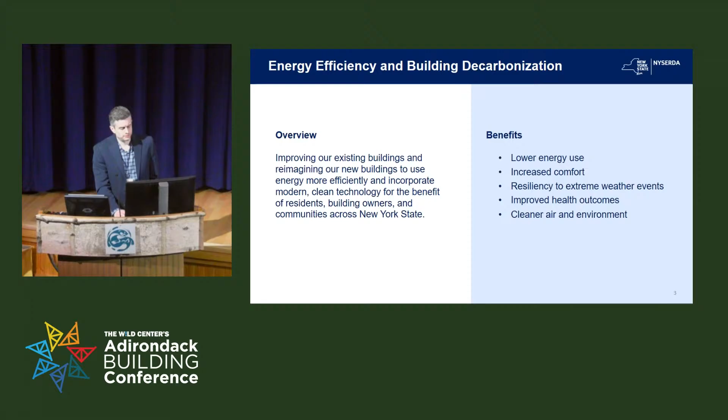NYSERDA's buildings work is focused on energy efficiency and decarbonization in buildings. We seek to improve our existing building stock and reimagine how we design and construct new buildings to use less energy and incorporate modern, clean technology for the benefit of residents, building owners, and communities across New York State. Through better buildings, New Yorkers can experience many benefits, including lower energy use, improved comfort, resiliency to extreme weather events, improved health outcomes, and cleaner air and local environments.

I think, as everybody knows, New York is a built state. We have some of the oldest building stock in the country. There are more than 7 million buildings in New York State, and buildings represent one of the most significant sources of greenhouse gas emissions. Our building stock accounts for roughly a third of the total greenhouse gas emissions in the state, with the greatest energy use coming from space heating and cooling and also hot water heating. So modernizing our buildings to be more energy efficient is critical to reducing emissions.

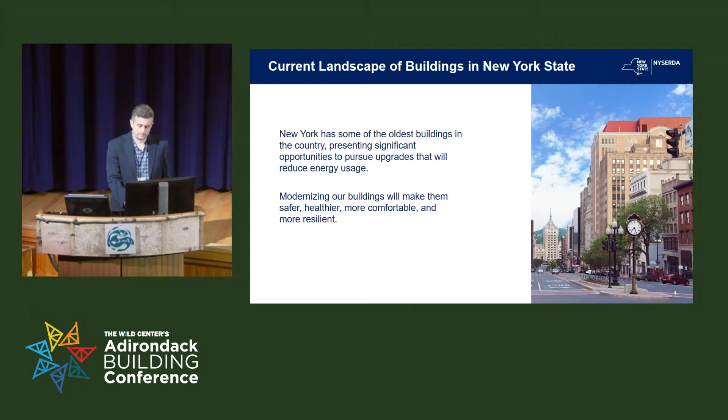So the bottom graphic there, the bar chart, focuses on commercial construction. I'm not really here to focus on commercial buildings, but the story's the same. Most of our buildings in the state are old. Similarly, understanding the types of fuels that are currently being used to heat homes, and how that heat and cooling is distributed within a building, are critical data points to understand how buildings can be improved. As mentioned, heating and cooling and water heating represent the bulk of the energy use in buildings.

In residential buildings, the predominant source of heating fuel is natural gas. The balance of these fuels is different in the North Country, but statewide, 70% of buildings rely on natural gas to heat, 20% rely on oil or propane, and 5 to 7% on electric forms of heating like resistance heat and, better yet, heat pumps.

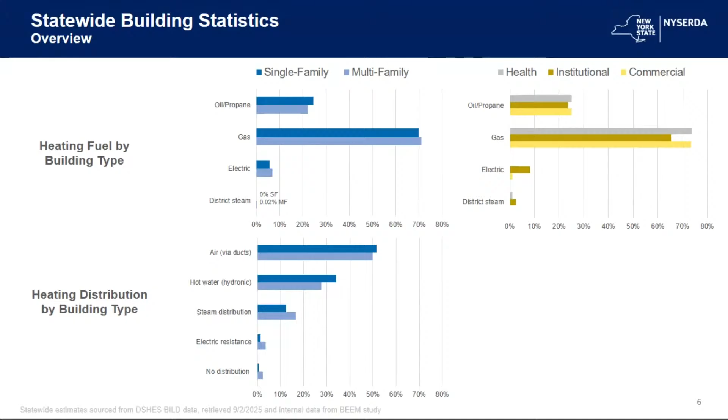Similar story for commercial, institutional and healthcare buildings and facilities. In general, about 65% to 70% of commercial buildings use gas, 25% use oil and propane, and electricity accounts for roughly 8%. Although institutional buildings like healthcare facilities aren't using a ton of electricity for heating.

So looking at a high level, some of what we do in our buildings portfolio. To advance energy efficiency and building decarbonization across New York State, NYSERDA implements some of the following strategies. We look at market transformation activities like demonstration projects. We support neighborhood scale decarbonization through programs like community thermal energy networks. We look at supply chain and workforce development and financing solutions to reduce risk and attract private capital for

projects throughout the state. We look at energy codes and standards to advance building safety and energy efficiency, which generate savings and improved air quality and health outcomes. And we support efficient decarbonization, focusing on disadvantaged communities and low to moderate income New Yorkers. Resource deployment helps build trust. It demonstrates demand and challenges product solution providers and manufacturers to bring needed technology to market.

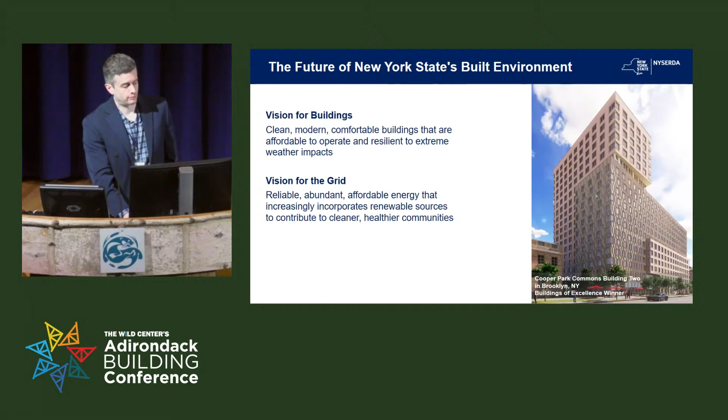So, as we continue our current programming and look to launch new opportunities for New Yorkers, we have two major goals. One being clean, modern, and comfortable buildings that are affordable to operate and resilient to extreme weather conditions. And two, that reliable, abundant, and affordable energy is increasingly incorporating renewable energy sources to contribute to cleaner and healthier communities. I'm just going to look at a handful of programs. There are many more, but I'll go through a handful that are designed to help meet these goals.

This was launched in April of 2025 to help building owners navigate the efficiency and decarbonization process. The Owners Representative Services for Multifamily Buildings program makes available a qualified group of technical experts. It's a no-cost program to help building owners as they plan, design, and install energy efficiency upgrades. These projects can access up to $35,000 for services, from project planning to construction and preparing for long-term operations and maintenance of the new building systems.

It's open to multifamily housing that meets at least one of these eligibility criteria: either located in a disadvantaged community, meets NYSERDA's affordable housing guidelines, is a condo or co-op, or is no more than 50 dwelling units.

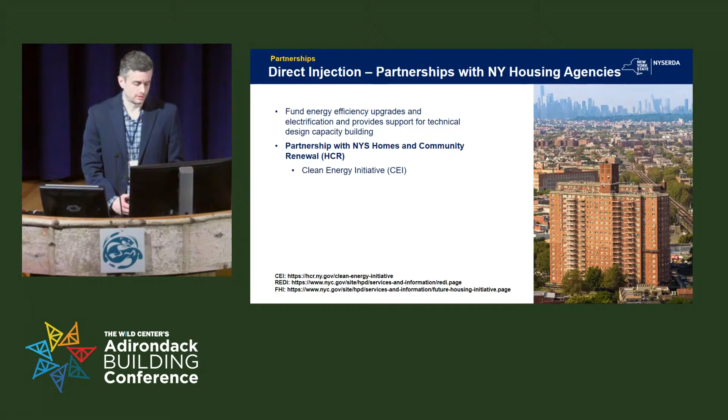The Clean Energy Initiative, or CEI, is led in collaboration with state and city agencies to provide funding for efficiency upgrades and building electrification. CEI is a partnership with New York State Homes and Community Renewal to develop a model for incorporating clean energy incentives and technology support into affordable housing. CEI funds efficient all-electric retrofits for existing and historic buildings, and it provides gap financing for that decarbonization work. NYSERDA has pledged $100 million in funding to HCR for this initiative.

The Affordable Multifamily Program Upstate, or AMP Up, is not yet released; it'll be launched this year though. But it's intended to make it easier for multifamily building owners and property managers to improve the energy performance of their buildings. Navigating retrofit projects is often complex and overwhelming, so the goal is simple: to remove barriers and make comprehensive building upgrades achievable and rewarding for owners and managers.

AMP Up is designed to feature customer support built around complimentary technical assistance. From the first conversation through project completion, participants will have access to experts who can guide them every step of the way. AMP Up is planned to offer financial incentives to support energy efficiency and building electrification, again, designed to make multifamily buildings with 5 or more units more affordable.

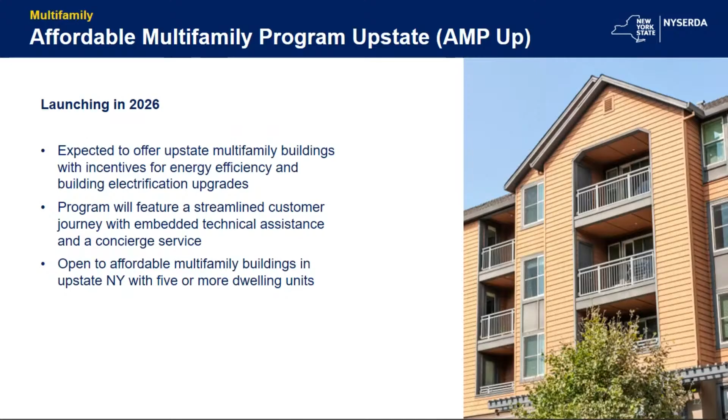Projects must receive electricity from an investor-owned utility other than Con Ed, so this is not eligible in Con Ed territory. Incentives will be available for 4 categories ranging in complexity. Those are prescriptive, weatherization, building electrification, and deep energy retrofit. And those incentives will be stackable, so it'll allow the program to meet customers' specific needs.

I'm actually going to skip this one because I think I'm running long. Briefly, there's a large-scale thermal program. This is a $10 million competitive program which was launched in June of '24. It provides cost share for design of large-scale thermal systems in new and existing single building and multi-building projects. It is meant to support projects that are replicable for significantly reducing greenhouse gas emissions from heating, cooling, and water heating, and minimizing energy consumption. This is open to new and existing large single building and multi-building projects.

We also have the appliance upgrade program. Residents that are under 150% of the state median income can apply through My Energy, which is found on NYSERDA's website, to receive rebates for ENERGY STAR certified heat pump clothes dryers, and that would include all-in-one washer dryers that are heat pumped. Additional rebates are available for any electrical wiring or panel upgrades that would be needed to support the new appliance.

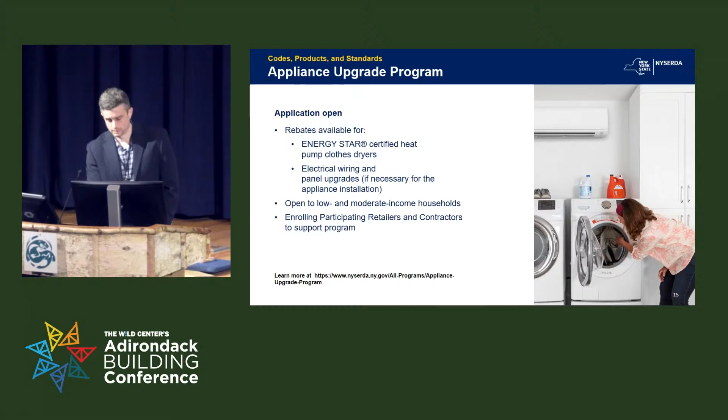So as I mentioned, I focus entirely on the energy code, and NYSERDA also works to support building efficiency and resilience through energy code development and compliance and enforcement. I'm sure many of you are very familiar with the energy code, but it's a minimum construction standard for efficiency in buildings. It's enforced at the local level. Sounds like we have at least one code official here. In general, it applies to all new construction and renovation. There are some exceptions. And it covers all major building systems. The code ensures that buildings are efficient now and through their effective lives.

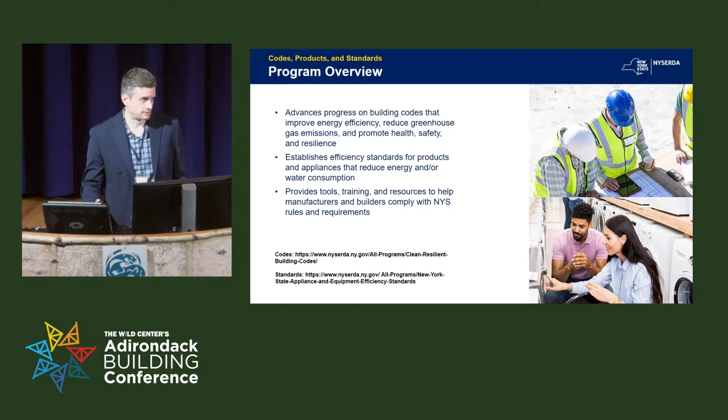Training is offered statewide. Almost exclusively, it's offered online at this point, although we do have in-person events that come up throughout the state, but it's almost always free, so keep an eye out.

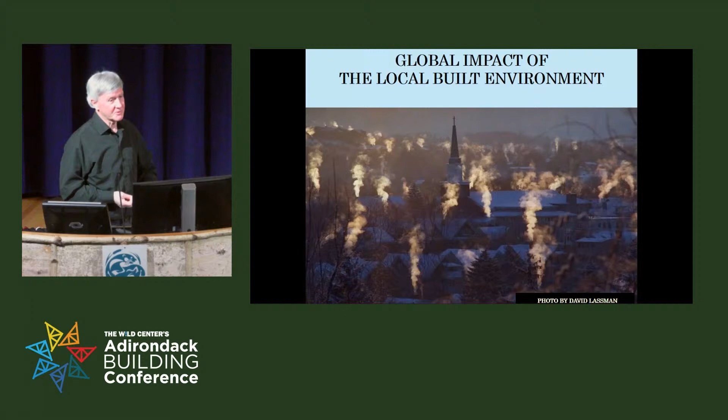This is a picture of where our office sits, up on top of this hill. If you look down here and think about it for a minute, our buildings really are alive, and they do create a lot of emissions. I think Chris just proved that when I looked at the slide, how many houses are still on either oil, gas, or in some cases coal, because there's a coal-fired power plant in the far back right of that picture.

So if you start thinking about what really happened five decades ago, well, actually it was a quiet marine biologist named Rachel Carson. When she published her book, she took on the chemical industry and parts of our government—Silent Spring—but she won. And that was the start of everything we need to know about energy right now.

It actually was the first code, the energy code. Our first energy code was ASHRAE 1975, and it was created because of that war that got started way back when. So we fast forward, and we're 50% better now. But our goal in New York State and the country right now, in that glide path, is actually zero by 2050. So this is getting pretty aggressive.

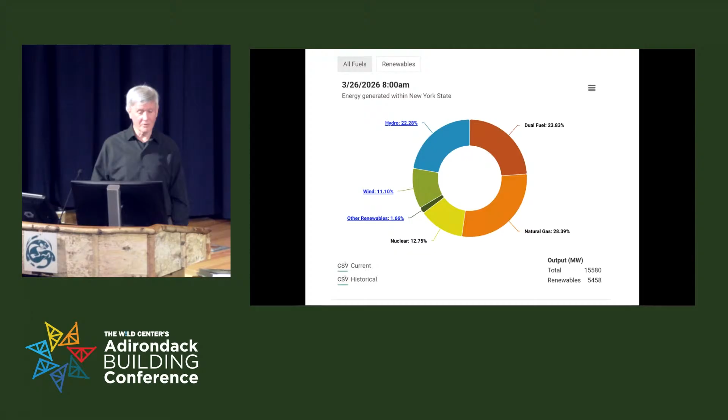It was actually one of the big things when Andrew Cuomo would stand up and say we have the best renewable energy in the nation, but it was all because of the hydro, and we know where the hydro comes from, right? If you look at the renewable side, hydro's at 64%. Yesterday morning, it was 20% less than that. So you can see what the oil and gas prices are doing to us right now. We're coming to rely and pull more of our energy in New York State basically from hydro, and you can see where wind actually jumped up a lot.

That's strictly New York State. We are getting hydro from—you guys know the line's running down the Hudson River right now into New York City, right? That's in play. That's the power coming from Canada.

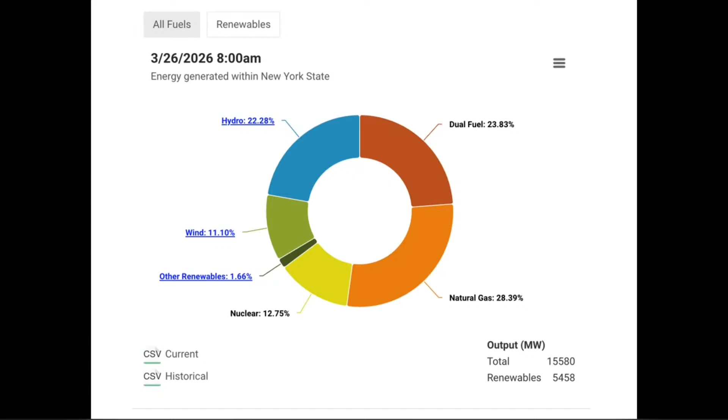Good question. Geothermal, and I believe nuclear was already up there, right? Nuclear is in there. Yeah, there it is right there, 12.75.

And it may go even worse than that the way things are happening, right? So on December 16th of 2025, that's not that long ago, there was a unanimous vote to accept the New York State Energy Plan as an all-of-the-above approach. So the New York Independent System Operator slide that I showed you is probably going to be what we're going to be seeing for quite a while now.

No. And this is where we're starting to hear these things over and over again. But in New York State, we do things differently, right? Andrew Cuomo, again, way back in 2006, skipped to 2009. We hit that code, and then we went right to the 2015 code. That was a 20% energy reduction in a simple code change.

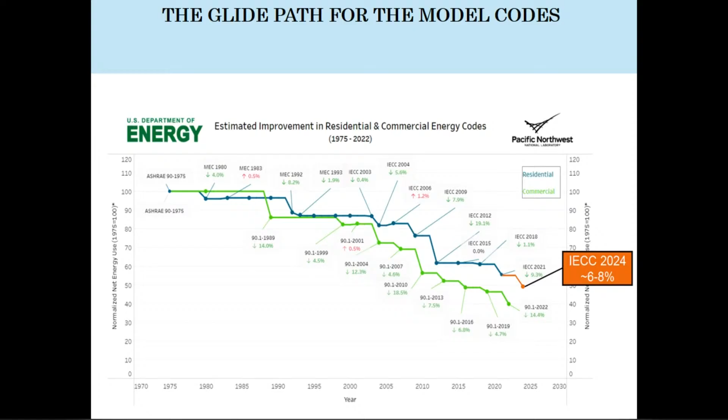So where are we now? If you look at it, we didn't do... starting with, I don't have a laser here, but if you start backing up the graph at the dark line there, see the 2015 code to the 2018 code, and now we just adopted the 2024 code. So we skipped the code cycle of 2021. So if you add those numbers together, we're much closer to about 17 to 19% energy reduction. That's where we are right here today.

And that's important. This is the first code cycle ever that's introduced two more performance tests. 2015 was the first ever code to introduce the air leakage test, the blower door test, right? How many are familiar with the blower door test in here? Everyone's doing them for your certificate of occupancy because it's required, right?

It's mandatory. It's not should, it's shall. All right, so when we start to look at these codes, we start to see what's really happening, right? There was no grace period, again, no transition period. We immediately went in on December 31st of 2025. At that last hour of last year, any permit that was pulled after that had to go into the new code.

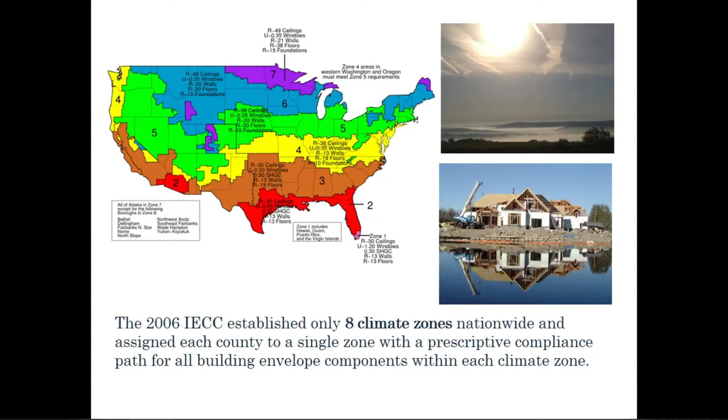What they did is they took 18 climate zones and reduced it down to 8. When I drove from south of Syracuse up here, I supposedly only went through 2 climate zones, but I'll tell you, I probably went through about 5.

When we build in the hills of Manlius, New York, up on the top right, we're in climate zone 5. When we build on the shores of Skaneateles Lake, we're still in climate zone 5. But they're totally different climate zones, right? How many of you know about Skaneateles Lake? It has the best sailing and the best vineyards, because we have westerly winds that come across the hills and blow across the lake. Great for sailing, great for growing good grapes for wine.

We're sitting on the east side of Skaneateles Lake here, right behind the biggest humidifier you could find. Because how do humidifiers work? They blow air across little bodies of water, right, in our furnace or air handling systems. That's all they do. So what we decide to put into our homes for insulation, building envelope, and air leakage, air barriers, is pretty different from when we build on top of a hill in Manlius, New York, versus on the shores of Skaneateles Lake. Hygroscopic building materials are not good when you're sitting right next to the largest humidifier in New York State.

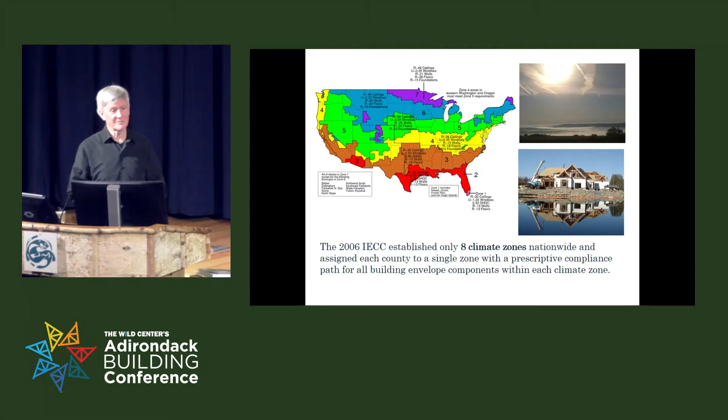So this is what New York State looks like. The climate zones haven't changed that much, or have they? Because Zone 6 has—look what we just did. We just moved 8 counties out of climate zone 6 into climate zone 5. All that movement is based on heating degree days, nothing else. That's all it measures: heating degree days and cooling degree days. Imagine that—it has nothing to do with the wind loads Art is going to talk about or anything else. We just slid 8 counties into Climate Zone 5.

That's going to get pretty important, because in Climate Zone 6 this year, for the first time ever, an HRV or ERV is required. If you're building in Climate Zone 6, you have to have a heat recovery ventilator or energy recovery ventilator, and it has to be set to an ASHRAE standard, ASHRAE 62.2, 2018. That's going to change—it's the standard referenced in the code book, and it will change outside of the code book, but it won't change until the code catches up to it.

That's important to know. When we talk about ASHRAE 62, it's a simple formula: 0.03 times the conditioned area of the home, which you can get right off the building permit, plus the number of bedrooms in the house plus 1. So what does that mean? Why do they say number of bedrooms plus 1? It means the ASHRAE standard considers that 2 people are in the master bedroom and every other bedroom has 1 person in it.

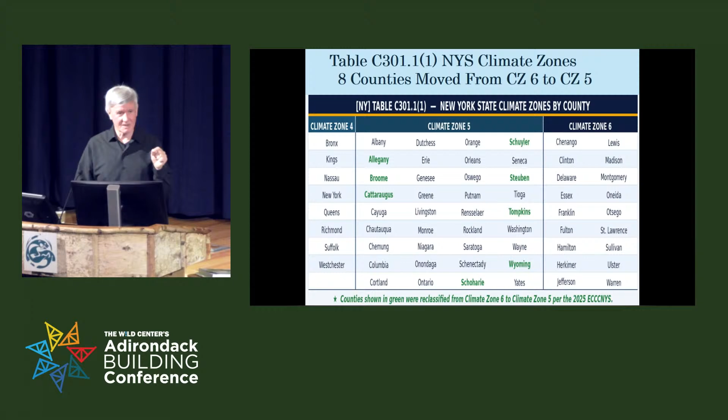This year alone, for the very first time, the code cycle decided that 5,000 square feet was a big house. And it means a lot—it changes the metrics of the prescriptive code. It changes just about everything.

That's going to be important, because here's the builder side of me coming out. ASHRAE 62.2 started a long time ago, way prior to 1975, the first energy code. It literally started like this: they put 10 people in a small room and introduced air changes just by opening and closing windows. When 3 people left the room, that became the standard. That was it, way back when—that's the 0.35 air changes per hour that we came up with.

That was it. In today's cycle, we went from 0.01 times the conditioned floor area to 0.03 times the conditioned floor area—it hasn't changed, by 0.02%, it hasn't changed at all. It's still based on the fact that 3 people left a room after a certain period of time. But the code tells us, because it references ASHRAE 62.2, there's a chart in the code book so you can look up the number of bedrooms, square footage, and it'll tell you how many CFMs you have to introduce.

Mandatory introduce, not should, it's a shall. How often in these big houses that you guys see that's 5,000 square feet, do you see 6 people living in that house? How often are they actually in the house up here in the Adirondacks? Not often. So we have a code that's telling us what the air changes have to be in that house, mechanically ventilated, that's based on a standard created 50 or 60 years ago, but doesn't necessarily do justice to the house.

So the big thing here is that the R49 reduction was because the building scientists proved in a simple flow chart, XY axis, that after R49, the return on investment was 2 to 3%. That was it. It makes no sense to go to R60 and have the builders pay for it and pass the cost on to the homeowners. It makes no sense at all. So they reduced it. That is the first time ever that has happened in the code. Everything gets stricter and reduces energy, but now we got something where someone actually listened to the building science and said, oh yeah, no, not that. It doesn't make any sense to make us pay for an R60.

And we got trusses or rafters 2 foot on center, and then we're piling up what? 38 inches of cellulose, which is hygroscopic. And if you don't have the proper vapor barrier, it's going to grab hold of that moisture, and those ceilings are going to start showing some fastener or nail pops and/or come down.

We actually did a low affordable, LMI they would call it, down in Schenectady, New York, which was a Race to Zero Energy winner in the Department of Energy contest. They won $25,000 for this, built it. They wanted to do better, so for some reason they put as much cellulose as they could on top of that ceiling, and it came down. So R49 is the prescriptive measure. Remember, these are the prescriptive measures, right? The other thing you start seeing, we're going to talk a lot about duct leakage, because that's a massive change in the codes right now.

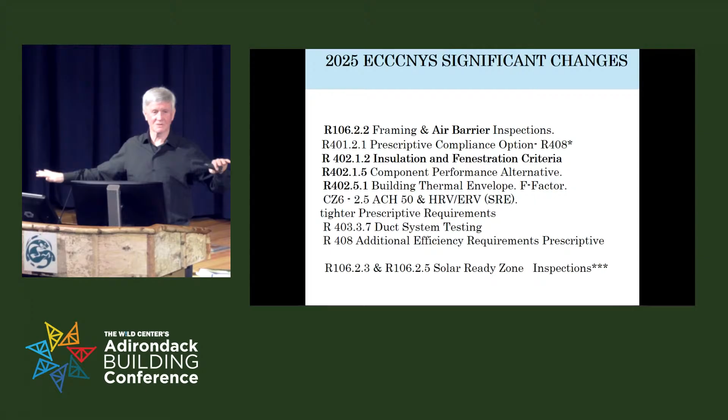Do you know where we get the most air leakage when we do our air leakage test with a blower door? We don't even have to do the forensics. The zonal pressure diagnostics, where we can put a tube into the ceiling and find out if the attic space is connected to the house. Put it into the garage. Where's your air barrier in the garage? Not Tyvek house wrap, right? It's the drywall. And it only has to be fire taped, right? And do we do as much air sealing in our garages as we do in the rest of the house? Not even close, right?

And what do we put in our garages? Everything we don't want in the house, right? Cans of oil, cans of gas, our car, our lawnmower, old paint products, everything that's going to outgas with high VOCs that actually do react in the atmosphere and cause harm. Well, if the air barrier is broken in the garage, that's a bad thing. And how do you inspect for an air barrier in the garage when all you got to look at is drywall?

That's it. You can't see around the base, but where your mud sill's hitting your concrete blocks or your concrete wall. So the next area, biggest area of leakage, it's not the ceiling. It's usually that perimeter of the base where you have a wood product that hits a concrete product. Concrete doesn't move and the wood's moving, right? We put this thin thing of foam down, and next thing you know, we're finding we're getting a lot of our air with exhaust-only ventilation.

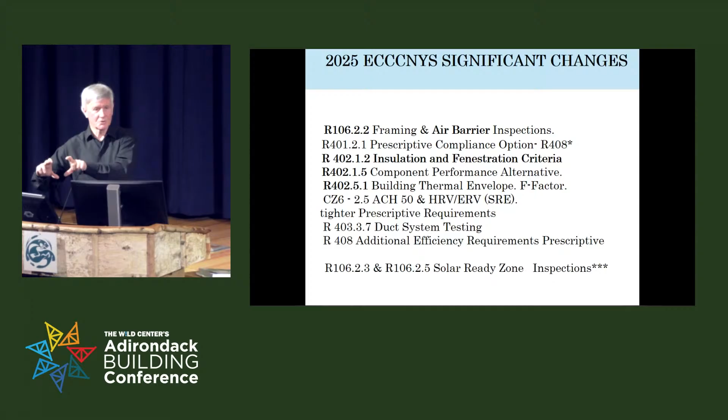We talked about the additional efficiency requirements, prescriptive path only, not in the ERI path or simulated. And then I just put in there the solar ready zone inspections. If you put one in, then you have to do it. But all those appendices were rooted out of the International Energy Conservation Code. There's like 7 of them that were built into the code, got passed, then on appeal were all taken out. What New York State and the 2024 IECC allowed is they put those appendices in the code book so that any state or municipality can yank them out and make them part of the code if they so choose. The only one that New York State adopted was the RF one. RF stands for residential fenestration, but the only reason it's there is because there's the chart for the F factor you have to use to put in your models. You have to measure the heat loss from your concrete slabs.

So here's the 3 pathways. I mean, this is actually on the exam when you take a plan reviewer test with ICC or whatever. There's 3 pathways for compliance. R401.2.1 prescriptive compliance option. There's 3 ways you can do it. It's a simple prescriptive. You're better than what they are by a certain percentage, and it's like 20%. So here you go. Here's the code sneaking in electrification. If you have a fossil fuel appliance in your house, you have to have a 20% reduction. If you're all electric, let's say air source heat pumps or geothermal, it's only a 15% reduction. So they're sneaking it in probably about 5 or 6 places here that unless you read this code book quite a bit, you don't even know it exists there, but it does exist.

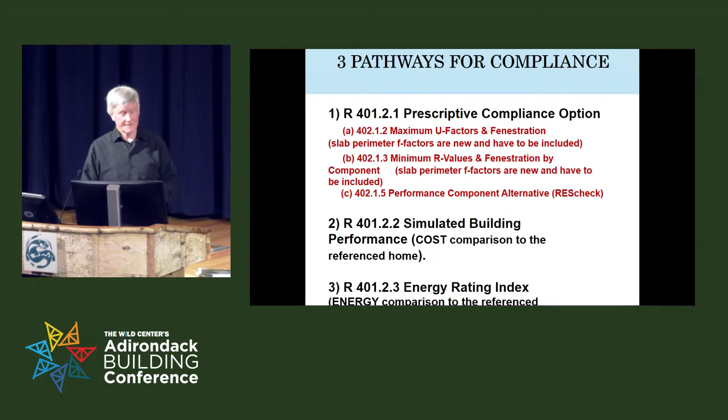So the simulated performance doesn't include lighting. It only includes your heating, cooling, and ventilating. That's all the costs they're measuring right now. And if you can beat that, you got it. I would say the most often one that is not used now, the energy rating index. I mean, we should have been using this for the past 20 years because 45L was that federal tax credit that gave you $2,000 if you hit the mark right now that we have to hit, right?

Builders didn't want to do it because you had to do all the other testing. You had to do the air leakage test. Well, 2015 code, got to do the air leakage test. You had to do the duct leakage test. Well, 2025 code, you got to do the duct leakage test. You had to do the mechanical ventilation test. Well, 2025 code, you got to do the mechanical ventilation test. We're there. The 45L tax credit.

There he is back there. I can't impress enough that my son Josh is sitting here. He's building on Cazenovia Lake, high-end house on Cazenovia Lake. He calls in for an insulation inspection. He doesn't get a call back for 3 or 4 days. He wants to get the drywall up. Time is money. You got a drywaller scheduled, you better use them, right? He hasn't even gotten a call back yet, so maybe he'll get an insulation inspection next week, right?

That's a municipality that can do what they need to do on their schedule. If you hire a HERS rater—here's the key—it doesn't have to be a HERS rater. If you want the tax credit in the next 3 months, it has to be a HERS rater. But to do the energy rating index, it does not have to be a HERS rater. It can be anyone the authority having jurisdiction says can do that.

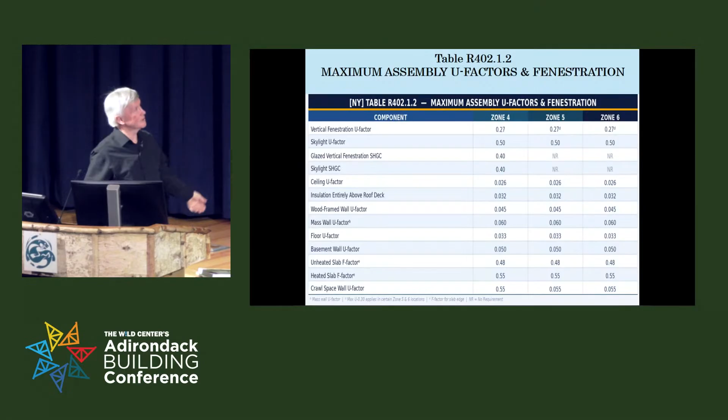This is the prescriptive side: the fenestration is 0.27 for all climate zones. The skylight, we won't go through that. Glazed vertical fenestration, the solar heat gain coefficient in climate zone 4—this is one where I think code officials had maybe 1,000 things, and hey, you got it wrong. Look at that, third one down: glazed vertical fenestration, solar heat gain coefficient, 0.40, climate zone 4 only, nothing else, right?

Let's go to this one. Oh, look at that, third one down: climate zone 4, 0.40; climate zone 5, 0.40. Why the difference? What happened there? Is it an error? No, because we measure the resistance, the R-value, differently than we measure the U-factor. Even though they're the inverse—you can go from an R-value to a U-value just by dividing by 1—because they're the inverse, but they're computed differently.

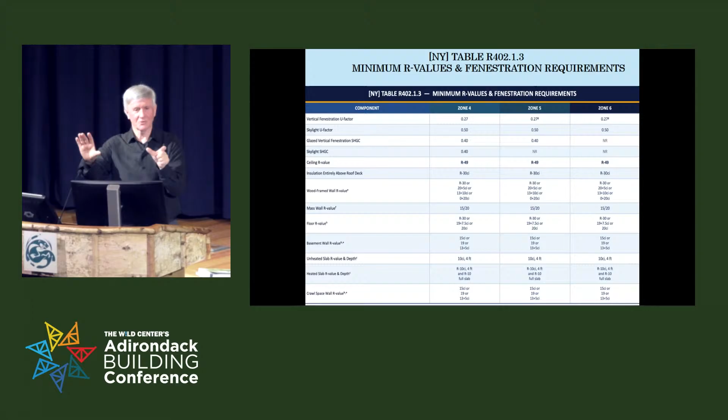So if you start to look at these prescriptive charts, you better know what you're looking at, because in climate zone 5 we do have a solar heat gain coefficient of 0.40. So now you're talking to the window manufacturers that prescriptively say—I'm just going to use Marvin Ultimate because I get more calls about that than anyone else—that meets the 0.27. But now if you use that other part of the prescriptive code, you've got to put the solar heat gain coefficient in there. For everyone who knows about windows, the solar heat gain coefficient and the U-value change with each other. When you start lowering the U-value, you're raising the solar heat gain coefficient. Simple physics.

Wood frame walls: you can rate it across R30 in climate zone 4. If we sneak over, they're all the same—right across the board, climate zone 4, 5, and 6. How do we do that? How do we get an R30 in a wall assembly that's, say, a 2x6 wall assembly? Can't do that directly—can we do 20 plus 5 continuous? Continuous insulation on the exterior or the inside means continuous. It doesn't mean you can put something between the foam or whatever you're going to put out there—it's got to cross all framing members, right?

That is the biggest benefit for the buck, because if you take a wall assembly—and I'll show you this a little bit later—reality: if we look at, let's say this is a wall assembly back here, and we say, oh, we just put R20 in the cavities, is that an R20 wall?

Not even close. If it's 2x6, 24 inches on center, it has a framing factor of 23%. 2x6 studs are only 5.5 inches, with an R value of 5.5. The cavity might have an R20, but the studs don't, the plates don't, the headers don't, the mud sill doesn't, the box sill doesn't, right?

So most of the computer generated models take that into consideration. Used to be called the UA total, now it's called the component UA result. So they're measuring just thermal conduction, nothing else. And if you put some insulation on the outside of these buildings, you just knock that thermal conduction down. You can pretty much start to play with the intricacies inside the models so you can get a wall assembly that you can actually build.

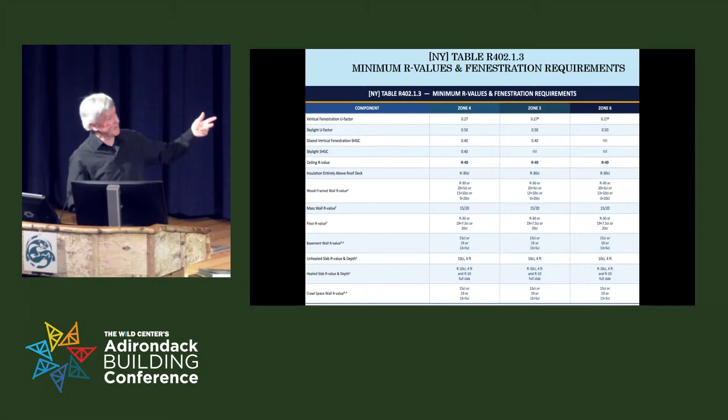So the heated slab has a different condition than the unheated slab, but we're still an R10 continuous 4 feet down. And again, there is a description of what continuous insulation means.

I think we all know this. R values are additive. You can add R values together and come up with the R value of the assembly, right? You can do that, but you can't treat it the same as a continuous insulation. It has to be different to comply with that table.

So when you get U values, I think the difference between an R value and a U value, I'll go into this a little bit later. U values include what an R value doesn't include. You take the U value of a wall assembly, it includes the air film on the outside of that wall, it includes the sheathing, it includes the insulation, the R value that you just took the inverse of to get the U value, it includes the drywall, it includes whatever other finishes on that wall, and it includes the inside air film. That's what the U value includes.

R value does not include any of that. R value is whatever is stamped on that product you put in the wall, that's the only thing you can say it is, nothing else. And the code says when you put your insulation in the wall, it has to have that stamp on it.

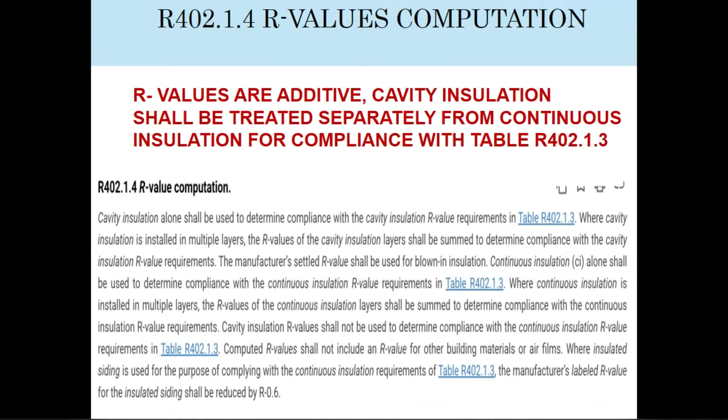Even the friction fit fiberglass has a stamp on it. So the guys that are putting in the wall have to put that batt in so you get to see that stamp, whether it's an R13, R19, R20, R21, R25, or an R30 - you've got to see that stamp.

For climate zone 5, the F factor for a slab is about 0.48, and if it's a heated slab, it's 0.55. That's another one of those things that doesn't make sense when you think about it, because remember, the higher the U value, the less good it is - U values, the lower the better. The higher the R value, the better. So they're the inverse of each other.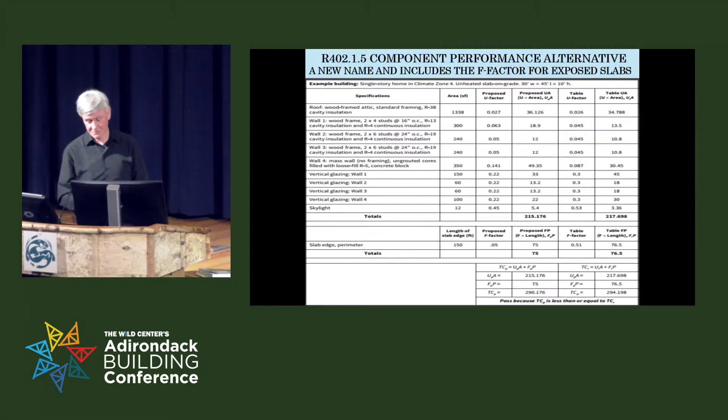F factor - thermal transmittance of the perimeter, the heat loss factor. I went through that, but there's the formula: BTUs per hour times the square foot times the F factor. The F factor is in a chart, and it was actually first described in ASHRAE 90.1, 2010, but was finally recognized in the residential world. That F factor came about because of a free download you can get called Therm, and Therm can measure the heat loss in concrete slabs, and it will show you that it's actually substantial.

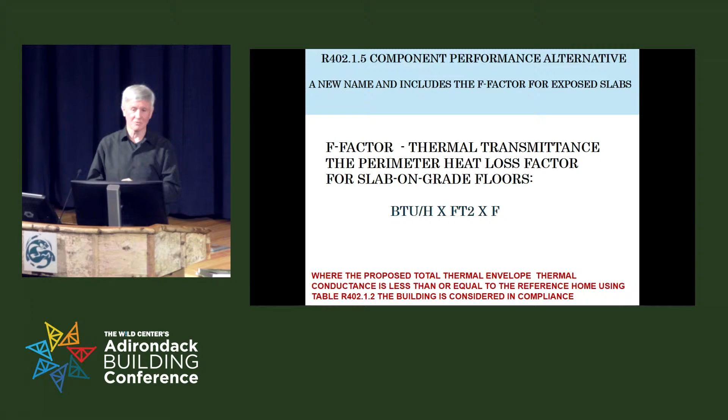I just came from Boston at another conference, and there's people refuting this now, so who knows? Code cycle is only 3 years, right? For some reason, New York State likes to take 5, and that's why we're getting these massive energy reductions all at once - so we actually suffer because of it. I mean, let's be clear, if they're going to gradually start to reduce the code and keep us on that glide path, it's not bad.

That chart that I had and Chris had, right - 7 to 8%, yeah, we can do that. But when it gets to be 17 to 20%, we're using different materials, we're designing our houses differently, and we're installing them differently, right? So it does make it harder on builders.

Res check, right? This is it. It's got the 2025 drop down in it. It also has, and for you code officers, I'm sure you know this, but if you don't know it, it has a checklist you can print out. So when you go to the job site, you should have that checklist with you and just check those boxes, and you got it. Or you hand that checklist to a HERS rater or someone you approved to do the ERI path.

I can't imagine why anyone would want to not go the ERI path. It just boggles my mind. We're doing the same testing. You got a third party.

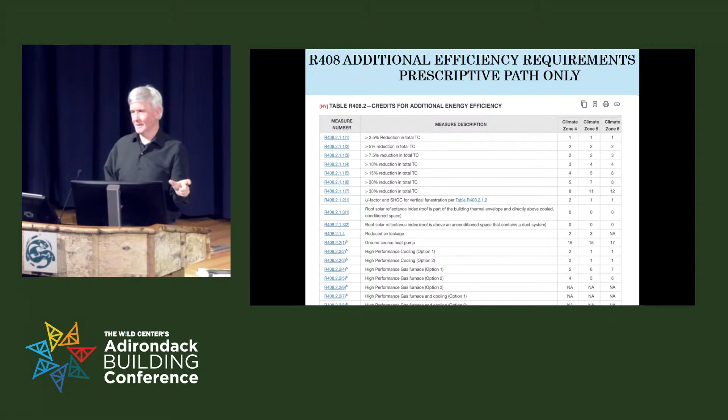You can say, well, I'm in climate zone 6, I'm going to go for that one, I got 12 points. Well, you still have to pick another one. You got to have 2 categories, and if you're over 5,000 square feet, you need 5 more points, so that means you need 3 more points, and you got to choose. And it's up to you, as the builder, architect, or engineer, to choose this. Don't let the architect play around with res check without you guys as builders knowing what he's checking off, because you have to do it. It's not a should, it's a shall.

Glass options are in there, but you can see down at the bottom where the gas furnace options are, they're in there but not available because you cannot mess around with appliance standards. They're protected by the federal government. Whatever the federal government says the standard is for that forced air furnace, you can't make it any more efficient. You can't say it in the code.

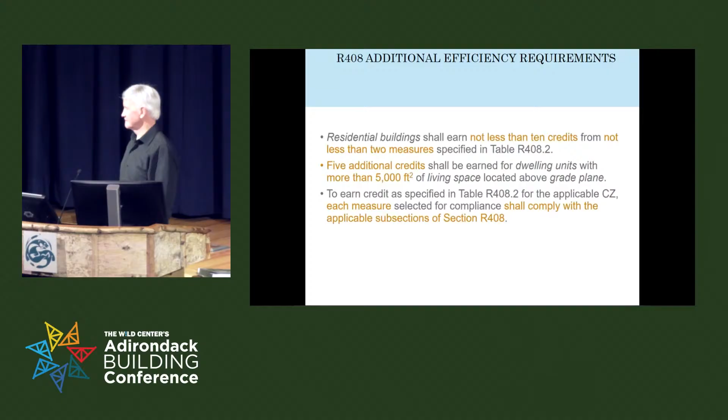It takes up, I think, 2 pages in this book. But for brevity here, that's it.

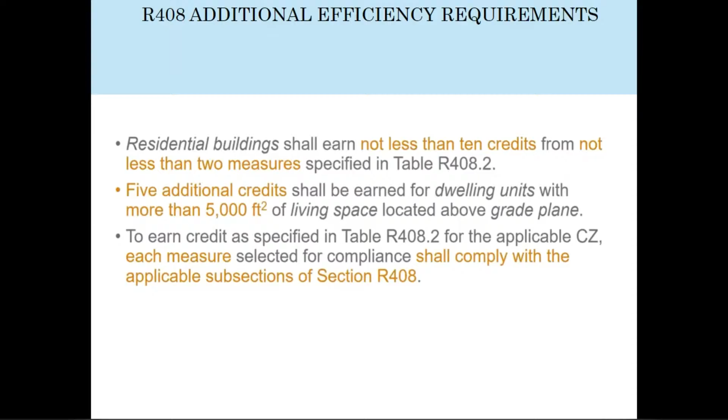So here is in writing, what it says in the code book is what I'm saying, right? So R408 is actually down inside the code book, more towards the end. You got to go looking for it.

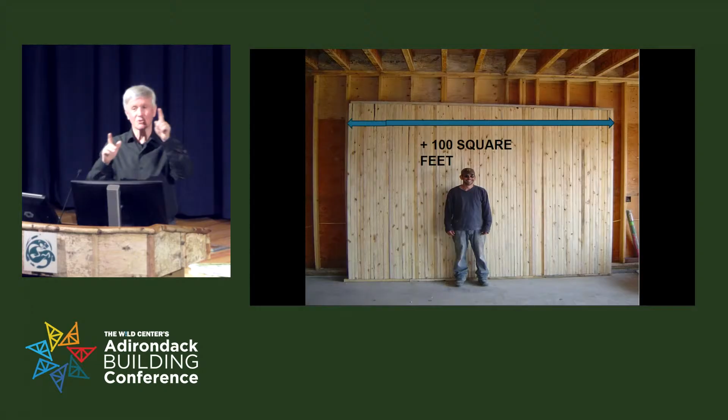So let's say we took out 88 studs, 14 headers. I saved $458 -- again, this is back in 2004. Go to your framing contractor and say, hey, that's a lot less work. You know what they say to you? You know, this is different, I got to use a different ruler or whatever. So they don't give you any credit on it. But there's the studs that I took out, because people can't see it unless you show it to them a different way. That's over 100 square feet of R 3.5 I took out of that wall assembly. And what did I put in its place? R 20, right? That's a big boost.

Interesting thing on this one, I think you guys know in the trades, right? The insulation contractors, at least back our way, they just count sheets of plywood, come up with their number, bid the job, and well, I got 100 square feet of insulation for free because he didn't catch it. He never caught it until he came to one of my presentations and saw me show that slide. And then he started to change his bids a little bit. But that's what it looks like.

They have over 30,000 acres of forest preserved each year, and what do the forests do today? Everyone says plant trees because they're actually recycling carbon dioxide for free, right? They breathe in the carbon dioxide, they split the carbon away from the oxygen, they put all the carbons together on a chain and put the oxygen back out in the atmosphere for us to breathe, keep the 21% oxygen in there so we can actually stay alive.

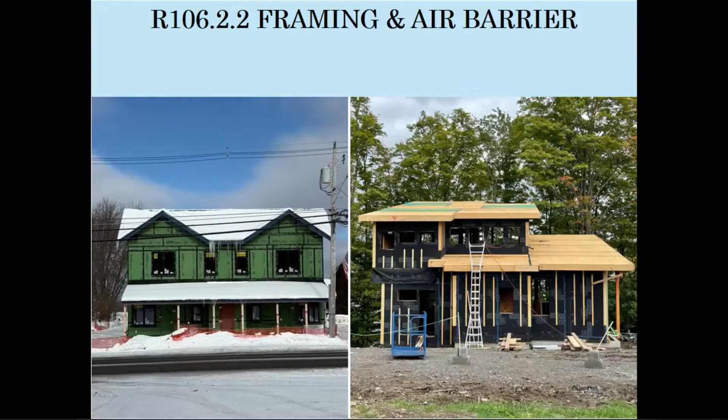Tupper Lake on the left. Rural energy house, all electric on the right. Tell me where the air barrier is. Where's the break on the left? That's good. I mean, you tape it up, you got it, you did your inspection, it's good. Easy to see. Yep. On the right, easy to see, easy to find? Not on your life.

4 inches of wood fiber insulation on the outboard, continuous. Vapor open assembly, because let's start thinking about what's going on with our buildings today. We start to say vapor open or vapor closed. We just moved 8 counties out of climate zone 6 down to climate zone 5 based on heating degree days alone. Nothing else. What about torrential rainstorms?

What about everyone going to put air source heat pumps or geothermal systems into their house? If you have an air source heat pump on your house and it's 80 degrees, you think they're not going to turn it on? The people who never had air conditioning before? Of course they're going to turn it on because you got cooling and heating in one unit.

And it has a COP of somewhere between 2.8 and 3.5. So every bit of energy you put into an air source heat pump, you're getting anywhere from 2.8 to 3.5 of energy coming back at you, just by taking the heat and cool from the air, right? But when we air condition our houses, where should our vapor barrier be?

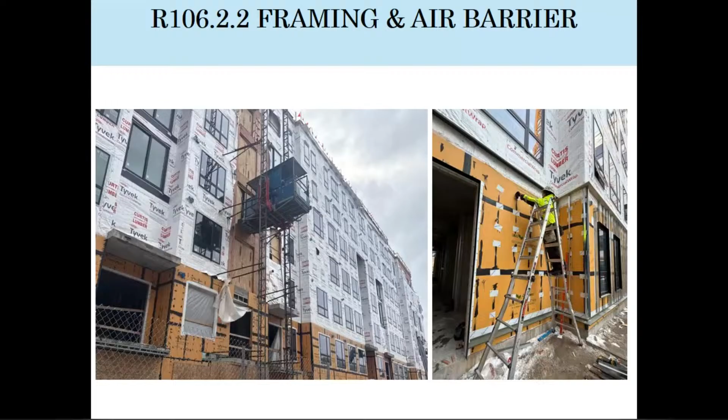Oh, this is a job I'm working on right now, right? 610 unit, it's multifamily, it's more than 3 stories, so it's not in the residential code, but I'm showing it's like, where's the air barrier here? I've got to find it, and I can't find it with a blower door test. I can't do pressure diagnostics or zonal pressures here. This is a prescriptive project. It's $80 million. It's going to have 610 students in it, and we know what happens on Friday nights, right? Where's the moisture on Friday nights? In one of those rooms, right?

But we've got to identify the air barrier, do a good job of taping. We got to identify what's going out. Oh, a big concrete projection on a balcony. Can't change it. The municipal code officers came in and failed them because their poly didn't wrap on the headers and the studs perfectly and wrap all the way around the window extension jambs and tape to the window.

Oh, here you go, code officers. Mandatory. Shall. You've got to test the mechanical ventilation. It's got to meet ASHRAE 62.2, or it's got to hit that chart that's on page 97 of the code book. And the only reason that the code officials gave you a chart is because the code cycle is every 3 years. ASHRAE can change anytime. If ASHRAE changes before the code changes, you got a mismatch.

So there's a chart inside that book that you can go across to the square footage, and you can go across to the number of bedrooms. Remember, it's the number of bedrooms plus 1 for ASHRAE 62.2. For whatever reason, there's always 2 people in the master bedroom and a person in every bedroom in the house, right? But so I would use the chart.

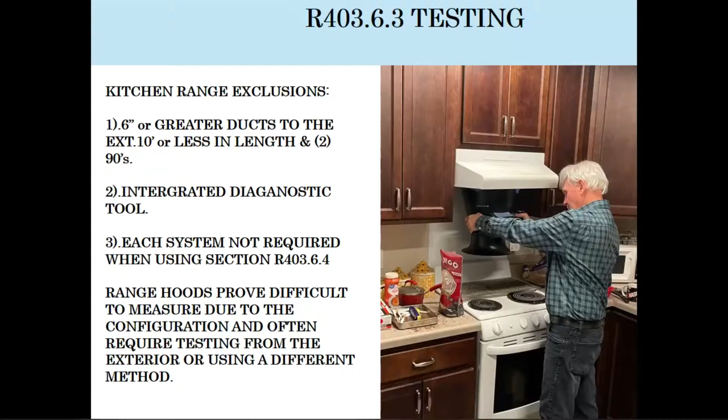For your kitchen range, there's one small exclusion, and I canvassed the builders in our area. I go, how many can you put in ductwork that's 6 inches or greater, less than 10 feet in length, and only has two 90s? Most of them go, no way. Most of ours is like 30 feet. The big 610 unit multifamily building, theirs are between 60 and 70 feet. I go, you can't do that. You're in a 4-inch duct. You can't push air that far and expect it to get to that exhaust and be exhausting 100 CFM intermittent or 50 CFM continuous. You got to meet that metric.

So here you are, after someone moved in. I'm not going to say what project this one is, but I probably should say it was a Building of Excellence project. But I had to go in afterwards because for multifamily, the people who review my work were out in California. So I had to go in afterwards and retest all the ventilation of the range exhaust in order to pass.

And right there on the left, I can understand why this apartment was so popular, because I think you guys know when they buy the cigars and cigarettes and they dump the tobacco out, I think you know what they put inside, right? So better make sure that exhaust fan's working, or the whole apartment complex is going to be on it.

So it's hard. It's not easy to do this. They actually make a fitting that fits that exhaust fan, because if you're on the 5th floor, you can't go outside and measure from the outside. You can do it maybe on floors 1 and 2 at the exhaust vent, which we're allowed to do. Most of them have to be measured on the inside. This is in the code right now today. As of the 1st of this year, we have to measure the mechanical exhaust and the range exhaust. And it has to hit a number.

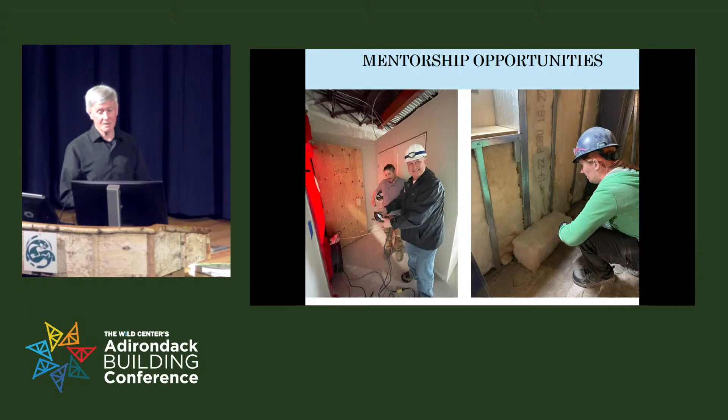And allies - the big job I'm talking about in Syracuse has 350 people on that job site every single day, and probably only 50 of them speak English. That's part of the reason we're translating this into Spanish for NYSERDA. We think it's a big thing, because right now I have to go and point. I don't know enough about Spanish - they're trying to teach me, but inflection of words means different things in Spanish. I think we all know that.

So these guys are proud of their work. They're from Tennessee - they fly up, work for 3 months, go back. Then they go to Colorado, a different job. They go all over the country on these jobs. I think we're making them better at their jobs by telling them how important they are, because it's not just here in Central New York at Syracuse University's campus - it affects their next job in Colorado too. If we can just tell them how important their job is, because the better they do the installation, the less energy the house is going to use from now until the end of its life.

And this is all about energy reduction. They have the most important job - not the architects, not the engineers. Everything that breaks in our houses today, I can say 90% of it isn't the technology, isn't the product - that's just physical, it's us. It's the installers - we do it wrong. We need to incentivize these people to do it right, because if they do it right, the energy models actually do work.

Here's the equipment. Every code officer has to have this piece of equipment unless they designate a third party, these guys in the back. And this is what it costs: a blower door kit, you might as well say it's $5,000 by the time you get it here. A duct blaster, $4,000 - the cheapest one you can get. Some people use anemometers, but they're not accurate. If you're in an Energy Star program, they won't allow it - they're going to go to a pressurized hood on the far right, which costs $1,736. That's what they're leaning toward. So you might as well say you've got $12,000 worth of tools, and $6,000 of that you never had to have before. It's in the code right now - code officers have to do it. If you don't want to do it, you better hire someone to do it.

The person that does do it better knows what they're doing and better calibrates their manometers and this equipment. Every year you've got to get this stuff tested. And a duct blaster test is not an easy thing to do.

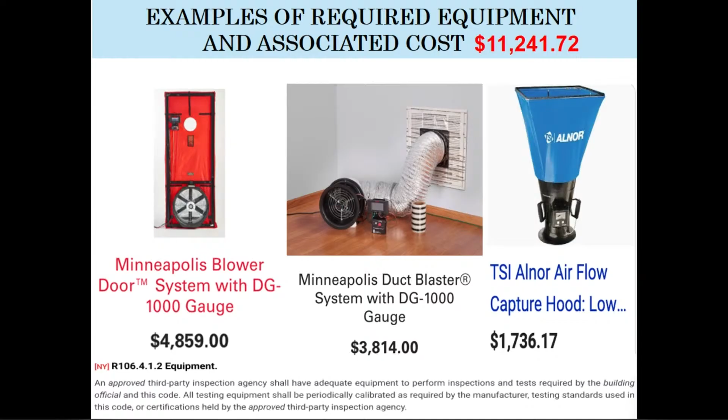Fenestration criteria, U factors and solar heat gain coefficient. What does solar heat gain coefficient mean? It means, in this case, if you have a solar heat gain coefficient of 0.71, it's 0.71 of that long wave radiation that makes it through that window. That's all it means. That's all it measures.

Low-E coating up here, when we had COVID and before that, some of the housing stuff going on where the housing bubble burst and the financial world was in trouble, we were getting Energy Star windows. The builder was saying, yeah, I got an Energy Star window, it's stamped right there. Well, they never looked at the lower part and go, that is an Energy Star window for southern climates. We're getting windows over COVID that were turned around, had the emissivity coating on the wrong surface.

Up here, where do we want it on our surface? It goes like this, outside to the inside: surface 1, 2, 3, 4. We get to tell our window manufacturers. Cardinal Glass up in Canada makes like 75% of the glass for the entire country. You can tell them what you want. You're going to wait a lot longer, but you can tell them.

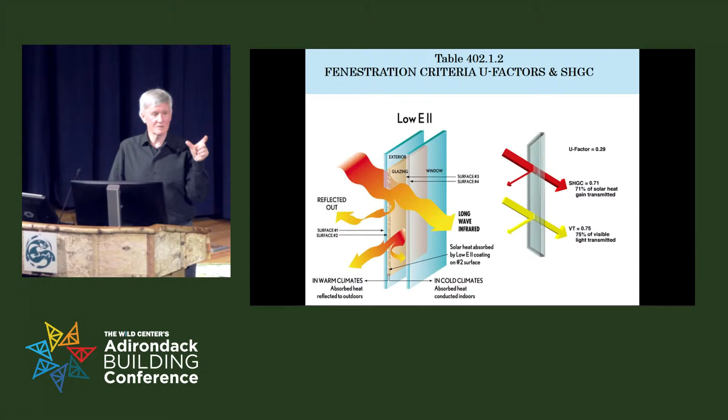You can say where you want that emissivity coating placed. In the commercial world, it's on the outside. In the residential world, it's always inside the glass because it's a soft coat, meaning that if little kids come up and scratch it, you're going to impact the coating. So it's always on surface 2 or 3.

And they had so much condensation on the windows, it filled the sill, an inch of water. So we got called in with guys like Terry Brennan trying to figure out what's going on here, how are we going to fix this? Well, what was happening with the window? Well, this is a COVID job.

It's out there now, and this is what we get to look at. We've got the U factor, 0.28 -- oh, prescriptive, doesn't meet the code. Performance, sure it does. Solar heat gain coefficient of 0.3, right? We know climate zone 4 and climate zone 5 have a prescriptive value for that. Visible transmittance, but oh, look, bottom right corner: condensation resistance.

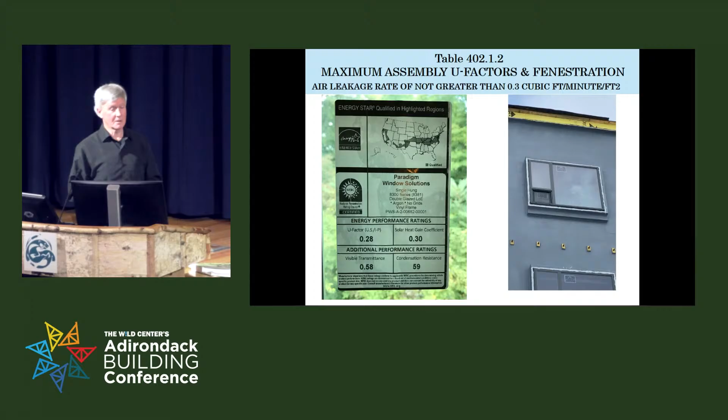Someone says condensation potential. This is an NFRC sticker that has to stay in the glass until a code official sees it. It has to stay on the glass, the builders can't remove it. When I do Energy Star projects or a HERS rating, if that NFRC sticker isn't on the glass, I know it ain't going to pass, because there's a reason the builder took it off. Because it didn't pass. National Fenestration Rating Council came about because of people cheating.

Some window manufacturers were saying, oh, we're going to measure middle of the glass, that's where our best U value comes from, or I'm going to do just the edge where the spacers are. Well, NFRC says you've got to do the entire unit, and everyone has to do it the same way. So that sticker is critical, and it's the only accepted standard out there. If you don't see an NFRC sticker, you've got to go to the code book and take the default, and the defaults are very, very tough.

Reduction in total conduction - this is continuous insulation, right? It's rock wool board on the exterior of this building. Again, this building has 1, 2, 3, 4, 5, 6, 8 sides to it because it has a courtyard in the center of 7 stories. Pretty impressive building, really.

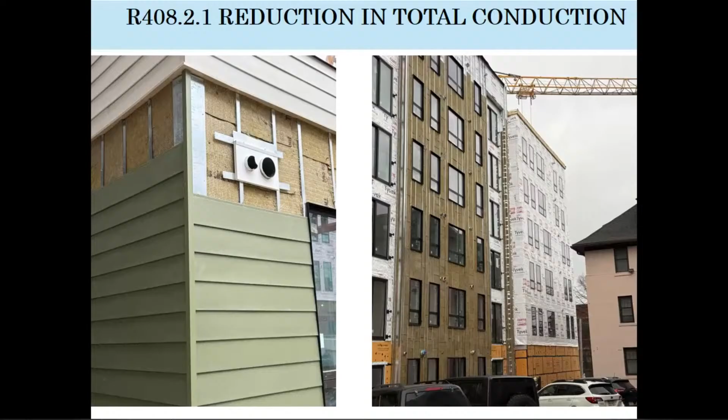There's a definition of continuous insulation, right? It can't be broken. It can't.

Okay, this is an old one in the code, but it gets to be more critical now because of what the prescriptive measures have changed with ceiling insulation. I'm going to read this: the design does not allow for a prescriptive R value, or whatever that computer model generated, you can actually go down to the next level.

So if you're going to do the prescriptives, let's say you're in REScheck and it says you have an R49. If you have an area like this, you can reduce it as long as that insulation goes out the entire area of that top plate and hits the outside uncompressed - you can reduce it. If it gets compressed at all, if you don't have an energy truss or a raised heel truss, you can't do that. But if it's uncompressed, because the minute you compress insulation, you reduce the R value.

Every insulation product out there today works by one simple thing: it captures air spaces. So fiberglass has fibers that are woven together, creating little airspace in it. Spray foam, same thing - little pockets of air. So it reduces the conduction of heat movement across the surface.

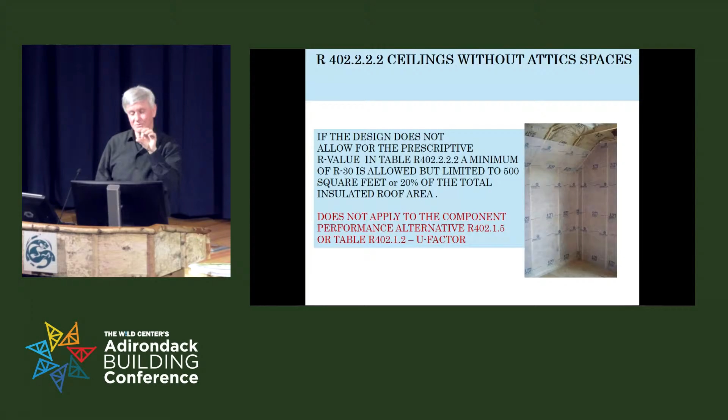Heat only moves three ways, and if you take conduction out, that's the biggest one. That is - your hand touches a hot pot and it burns, that's conduction. Radiation is when you stand with your face in the sun and you're warm and your back is cold, or you're standing in front of a fire. And then there's convection, so it can move by convection across those little tiny holes. But if you stop the conduction, you're doing something good.

So you're only allowed to do this at 500 square feet or 20% of the total insulated roof area. I don't know what code officer is going to go out there and start measuring and doing the math on that. Code commentary actually says you can have an informed guess by looking at the area.

If design does not allow - I just said this out loud - does not apply to the component performance. You can't use this in the U value. Remember, U value is computed differently than the R value, so it can only be used in one of those drop-downs in the prescriptive side. That's it. These are just raised heel trusses.

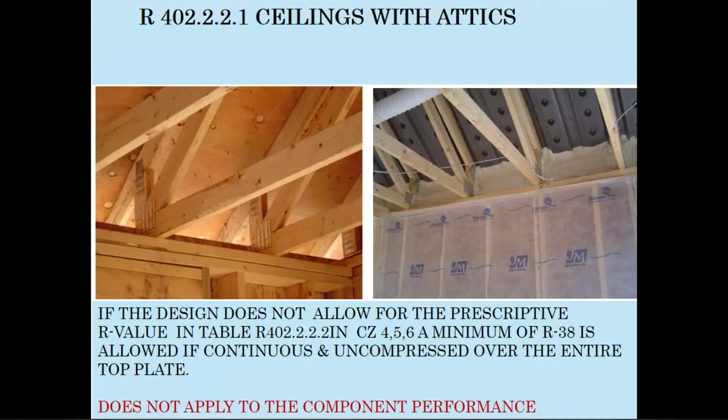This has, I believe, in Tyvek on the inside. Another one does too. I threw this in at the last minute because as HERS raters and Energy Star projects, we fail so many townhomes. And even, you've got to do the 3 ACH 50 in a townhome too - single family, 2 family, 3 stories or less, you've got to do it. And you go in there and the builder always says, I hear it over and over, well no one told me I had to air seal between units, so when we put the blower door in one unit, we're measuring the air of the other unit too, because they're not air sealing. That's critical that it has to be done.

You can also see, if you go back here, where's the insulation? The frost lines tell you. You guys know how to read roofs, right? You come back on a cold day after the frost hits, you can see where the insulation's failing. You can see the thermal bypasses. The natural world's telling us where they are.

Eave baffles are important. This is a real picture. The other thing about this picture that's pretty alarming - it's a class 1 vapor barrier on the ceiling, it's polyethylene. What do you see beaded up on the polyethylene?

Can't say it, but you can see it. The eave baffles stop the wind washing coming up through this soffit vent. You get these windy days, these high wind events like we're getting, and it blows the insulation back, and then we get the big icicles, right?

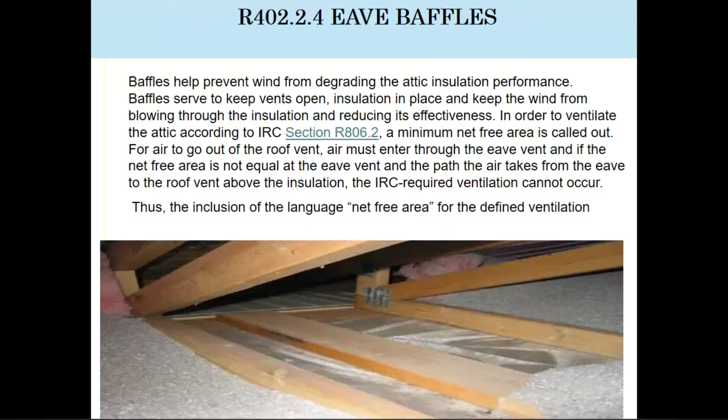Wood frame walls, so an attic knee wall is a wood frame wall. It's got to meet the intent of the prescriptive code or whatever you modeled. Whatever you told that wall assembly had to be, it's got to be it. And what does that mean? Air barrier on the unconditioned side.

So you can't have a truss that's separating conditioned from unconditioned space. You can't have a knee wall that's separating conditioned from unconditioned space unless there's an air barrier on the outside. How does that insulation work again, right?

When you test it in a lab, it's hermetically sealed on all 6 sides. They just measure the temperature, how quick it moves through the assembly, and they do it. If you don't have an air barrier on the other side, you just lost all of that insulation R factor, right? So you've got to meet the same conditions on a wood frame wall and an attic knee wall, and you have to do it on the wood truss as well.

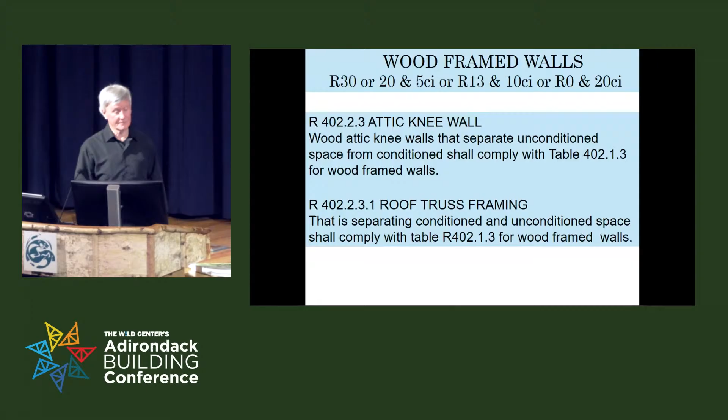I said earlier that, with an exception, most of our air leakage does come in from the garage or underneath our decks down low, but the simple physics is, and this is the second law of thermodynamics, right?

Warm air goes up. So the thought process in the really good weatherization crews is if you stop it at the top, you put a real robust air barrier in, what's going to happen? Nothing's going to come in at the bottom. One air in equals one air out. If one air can't go out, one air is not going to come in. That's a simple law of physics, right?

Stop it at the top, so when you do these existing homes and stuff, or in the new homes, your best benefit is stop it at the top, then go to the basement, and then do your sidewalls last.

So the attic hatches and doors into attic spaces are treated. I would say that that is probably the most important door you have in your house. You might as well say it's as important as your front door. And when you just drop a sheetrock into a framed assembly and throw fiberglass insulation on top, would you allow that to be your front door?

Absolutely not. You want to go into some of these older houses and look directly above where that attic hatch is, that's what we see. The air is leaking out, warm air is leaking out. Warm air holds more moisture than cold air, right? So it's taking warm, moist air, hitting the underside of the ridge, and you either see roof nails that are starting to rust or dripping, or you see this where it's very obvious what's happening, right?

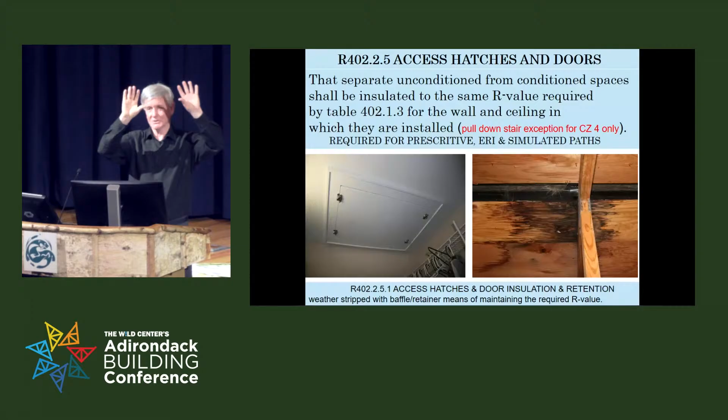And then what I don't have in this one—those holes aren't made just for code officers, right? They're made for firemen and everyone else to go up through it. You don't have to go up into the attic, but you have to lift that attic scuttle, slide it over, and they have to put little rulers around every 300 square feet so you get to see the insulation level. You don't have to go and measure it; they have to do that.

And then they have to sign a certificate that has to be posted in the mechanical room that says, I blew 30 bags of 3.5 density cellulose into that attic. And what do we know when we know that number?

What's it tell us? 30 bags has a certain coverage, right? So they have to say that and they have to sign it. They have to physically sign it. Either the builder or the guy who did it has to say, I did that, here's how much cellulose I put in that attic. Because I can't tell you how many times we go up in that attic and everything's perfect, then you walk down a couple truss bays and all of a sudden it starts to diminish, right? So they're telling you, and they also have to give you the rated value when it's settled. No more in the old days, after the 70s, when we're putting our thumbs out like a garden hose and you could fluff up the cellulose. Can't do that anymore because we have to give the settled R value and it has to meet the intent of what you guys did on your planning review, right? It's got to say it.

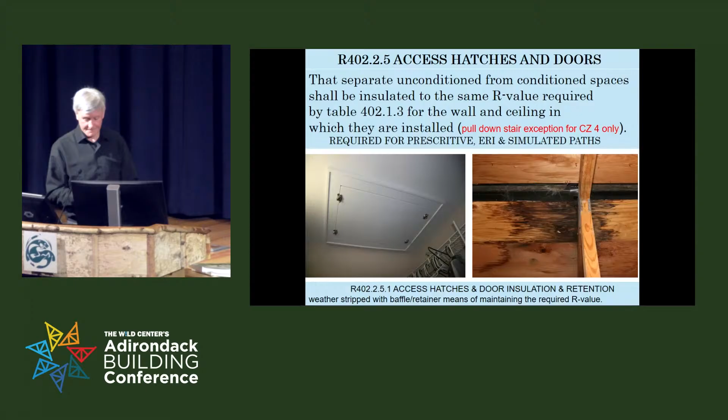Here's an example, just component performance alternative, right? If you have 990 square feet of an attic insulated to R49, and 10 square feet of it, that's a pull-down stairs size, insulated to R1, which is giving it a lot of credit, what is the average R value for the entire attic? So right here, we're just going R value to U value, just doing the inverse. Go.

And you know the first time somebody goes up there, if the fiberglass on it was glued, sticked on, taped on, or whatever, it doesn't make it back down the second time, right? And the guys who are doing the caulk around it, because the code says you got to seal it, once you break that caulk, it's gone. The homeowner's not going to put it back. The IT guy's not going to put it back. The heating guy's not going to put it back.

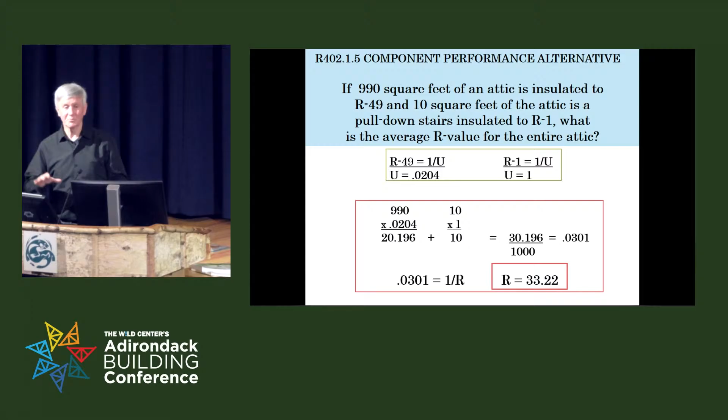And oh yeah, by the way, the heating guy shouldn't have to go in the attic anymore, because guess what? You're not allowed to put ductwork in the attics anymore. You can't put ductwork in unconditioned space unless there's rules, and they're very, very specific. I'm going to go through that in a minute, but hold that thought for a minute. No more ductwork in the attic space.

Stop at 11:30? Yes, oh, I'm going to hurry up then. Vapor retarders, Art's going to cover that.

I want to show you this one real quick. That was a fire alarm fire, an $800,000 house that just had $72,000 worth of roof on it and $30,000 of insulation. Is that a fire? Moisture. Fireman came in after another call, had soot all over the boots, walked over the white carpet. One guy had an IR camera, heat sensing camera. There's no heat up there, it's not a fire.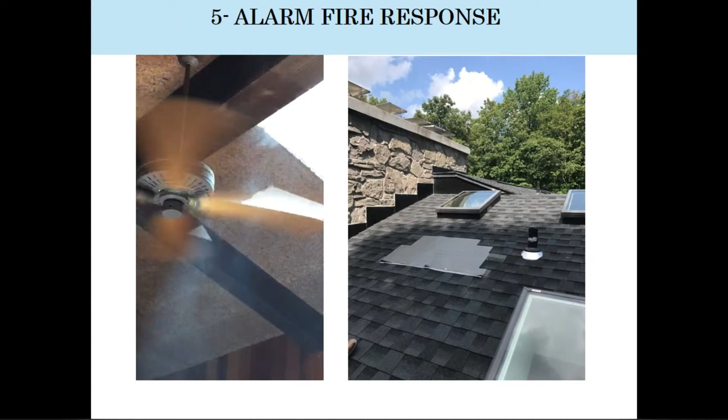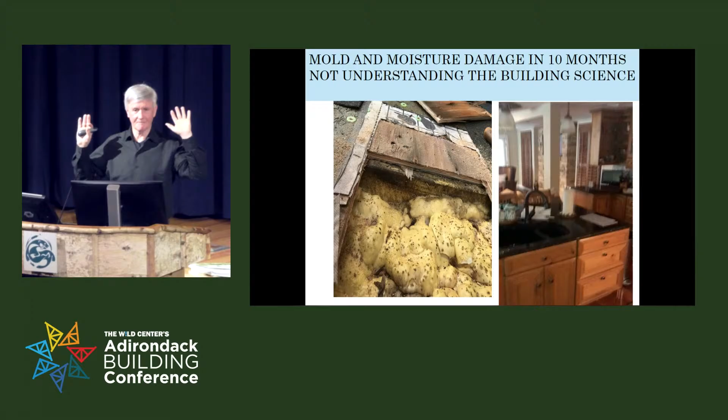So our move was over on the right, cut it open, see what happened. Ten months. What'd they do? They took fiberglass insulation out because everyone says it's no good. Had a vapor barrier on it, kraft face, right? They put open cell foam back, covered it up, took the vent out because now you had it foam sealed. So what did we have to do to fix this? And it was a big lawsuit, it wasn't a small one, right?

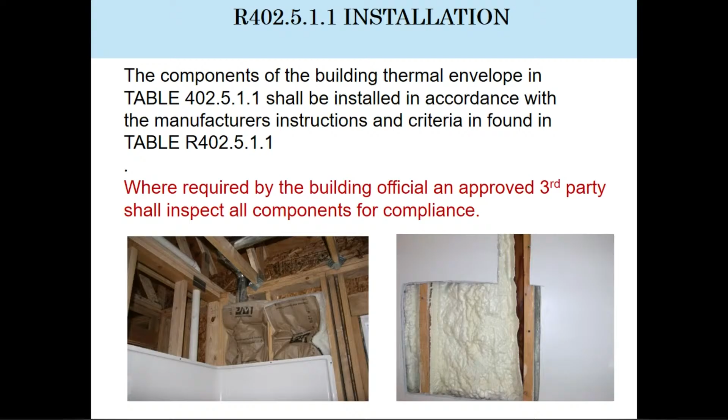Here's some of the smart vapor barriers. CertainTeed's made them for 20 years now. The membrane is called MemBrain. All this stuff is on the market, readily available right now. Most of the guys in passive house wrap it all the way up and around the ceiling and back down the walls. What we usually see when we're out looking at stuff is this one, approved for drywall on the left. We do a lot of zonal pressure diagnosis with IR cameras. You can see the big miss here on the left.

Temperature, wind, CFM result, whether it's a temperature correction factor. Golly, this winter we were doing a temperature correction factor that went all the way from 0.947 down to 0.902, I think. Yeah, you got to do a correction factor. You just can't take the reading off the manometer and say, hey, it's 3 ACH50, you pass. It's corrected by weather, because when you have a cold day versus a warm day, the air density changes, and it changes the reading, but you got to do that.

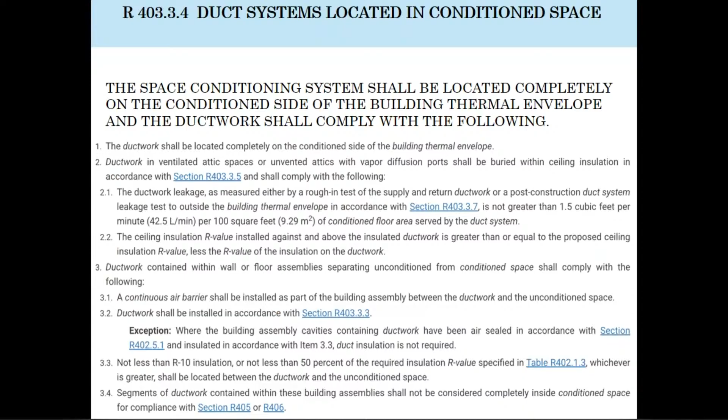This one, duct system. I got to talk about this just for a minute, all right, Jen? Yeah, because this is like critical, right? I'm going to go right to this one. So, looks like we have a little bit of an issue here, but duct systems located in conditioned space. If you want to say you're in conditioned space, you better be doing this, right? So if they're going to use the attic space as a chaseway again, it's got to be buried in the insulation.

The sum of the insulation against and above the top of the ductwork is greater than or equal to the proposed ceiling R-value. And subtract the R-8 off of this duct because it's bigger than 3 inches. It's only got to be R-6 if it's 3 inches or less, right? So it's got to be buried like this, but what else do you have to do? You got to test it. You got to test it with a duct blaster.

And now you're not just testing total leakage. Total leakage means you set up, I showed you what the duct blaster looked like. You're only blowing 25 pascals into it, and you're measuring the leakage that's coming out. You put the ducts in the attic like this, you got to do total duct leakage to the exterior. That means your code officer's got to set up a blower door, pressurize the house to 25. That's a big thing to do, trust me.

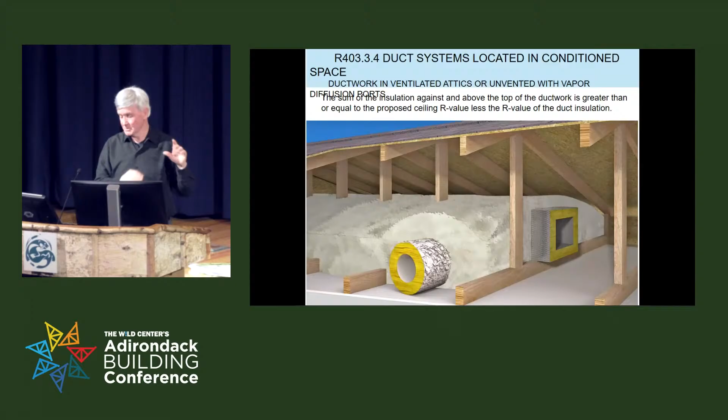Then you got to cover every duct in the house and seal it, and put this duct, let me go ahead here real quick. I think I have it, I can show you. And you got to seal up all the ducts in the house, and you're blowing 25. It's not an easy thing to do, I'm telling you, it's not. And then you got to measure the leakage to outside, and it can't be more than 1.5 CFM per 100 square feet of conditioned space.

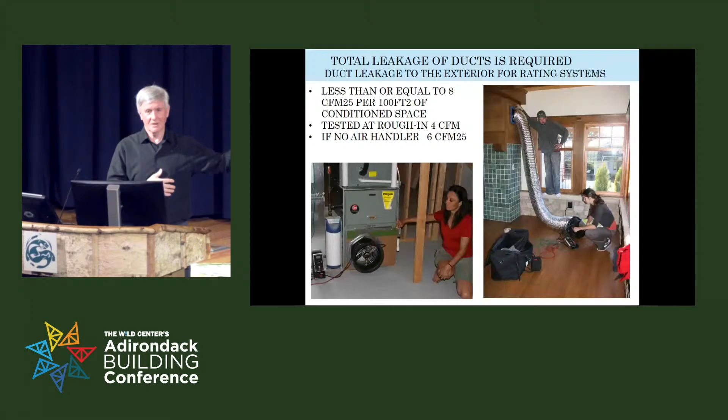I will tell you, after doing thousands of these tests, there's not a person in the room that's going to pass that test today. Even with high velocity where there's no seams in the ductwork, 3-inch duct, because you still got your big return. You're not going to pass. Don't do this. And if you do, be prepared to do stuff like this. SU College of Law failed, held up $380,000 worth of incentives.

This HVAC contractor, who was excellent, excellent, had to go buy his own AeroBarrier machine. And so 40,000 there, and he went through $30,000 of product just to find the leaks in this ductwork alone, right? On the left, this is Christmas Eve. The code official was kicking this LMI person out of the house. No certificate of occupancy. You know about Christmas trees and lights and candles and people in the house. They had the right to do this.

It was unsafe, right? It didn't pass the ductwork, so we're in there doing AeroBarrier across the kitchen countertop, getting the ducts sealed. This was down in the city of Ithaca. Real high-end product for LMI projects, right? And this is how we had to fix it. You don't want to be that guy. The builders in the room, you do not want to be these people cutting holes in someone's ceilings, going up, trying to find leakage in the ducts to pass. You don't want to be tracing around the attics. Trust me, you don't want to do that.

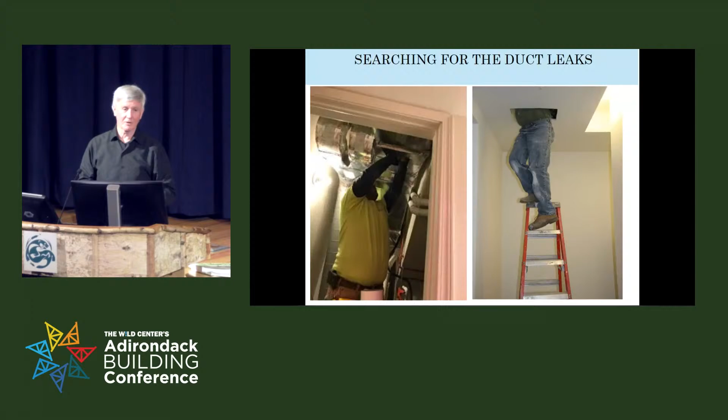So what the code world is saying out loud: get all your ducts inside conditioned space. Don't put them in the attic or you're going to do that test. And even though they're in conditioned space, you still have to test them. This is the simple stuff about 3/4 inch pipe, you gotta have the insulation. This is an HRV for those of you who are familiar with it. It's what they look at. The airstream never crosses. We just had a big job out in Colorado come and say, I can't do that because I don't want to mix the air.

They never mix. They never cross. They're going through a filtration system, which can be all the way up to a MERV 13, which means we're actually taking 2.5 microns of particulate matter out of the air. So if the smoke comes again, we can deal with it if we need to, but we should be turning these off. And in New York State, the 2 tubes at the bottom, they should have a recirc mode, and they should have a place for your condensate to go.

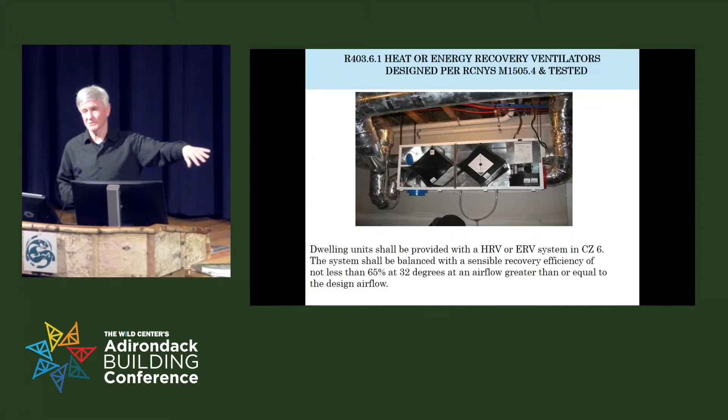If you have a winter like we had, and your ERV or HRV isn't capable of doing a recirc mode, you're going to freeze it up, because you're bringing in what? 10-degree air and crossing across the coil? They do have filters in them. Building Excellence Project, right? So third-party testing, performance testing, finds these things before they become big problems.

There's the chart. There I am measuring it. I wanted to go backwards, not forward. There's the chart I said you can use, it's in the code books.

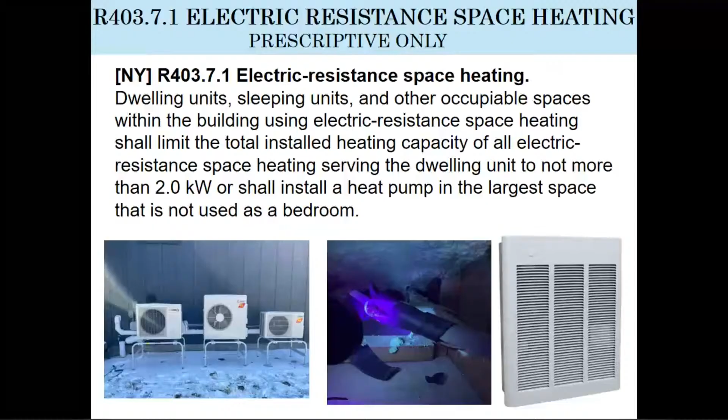So remember I said they're sneaking the electrification in? If you have a fossil fuel house, you've got to meet different amounts of additional energy efficiency credits. Well, here it's saying that if you're all electric, we have a builder down in the Syracuse area, said, oh, this is easy, all electric. I'll just put electric baseboard in. No, not that. Code says can't do it. You can't do anything over 2 kilowatts, and that's if you only put a heat pump in as well. So they're telling you right now, be ready, it's coming, it's here, whether we know it or not.

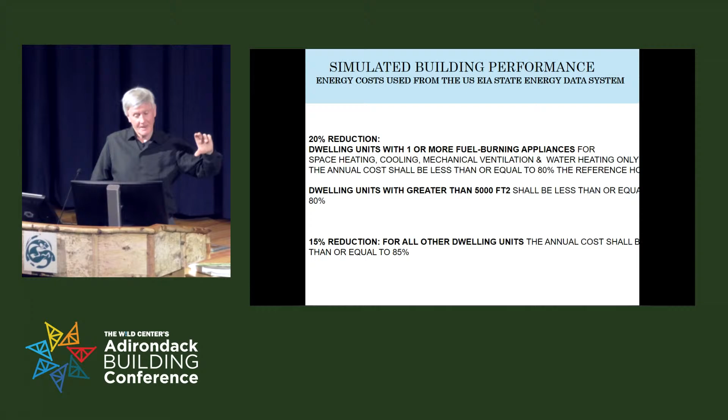So simulated, I think I covered that earlier, but here you go. Dwelling units with 1 or more fuel-burning appliances, right? Space heating, cooling, mechanical ventilation, and water heating only, that's all it measures for the cost. And it's got to be 20% better if you got a fossil fuel burning plant in that house. If it's all electric, it only has to be 15% energy reduction. And if you're over 5,000 square feet, you're back up to the 20% energy reduction, right?

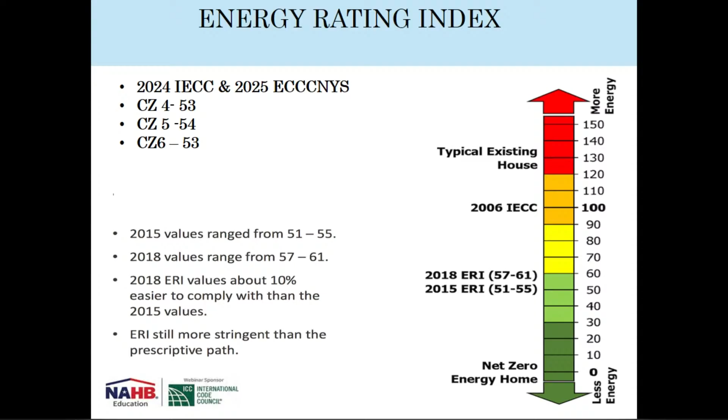Energy rating index, talk to those guys in the back of the room, or you can come on down and talk to Josh and I. We do a ton of these. What it looks like, a house that hits a HERS 100 is how it's built to code. A house that has a HERS index or an ERI of 0 is zero energy. And up here in New York State, we got to be in climate zone 5 and 6, 54 or 53. If you want that 45L, that hopefully does come back someday, all you got to do is hit 50%, 50% better than code. You get a $2,000 incentive.

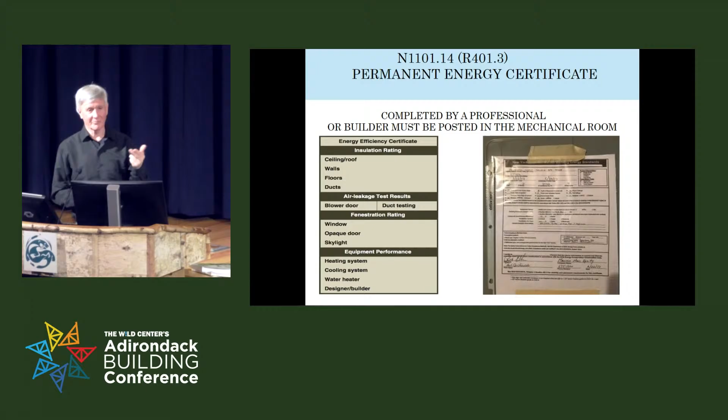Oh, and I should probably end on this one. How many people go into a house as a code official and see the permanent certificate in the mechanical room? Anyone? I got 1, 2, 3. Do they list duct leakage test on it or air leakage test? Sometimes. Yeah. So right now, it's not just the air leakage test, it's the duct leakage test and mechanical ventilation. Those have to be on those stickers now. The stickers aren't out yet. You can get them from ICC, but they're not out anymore.